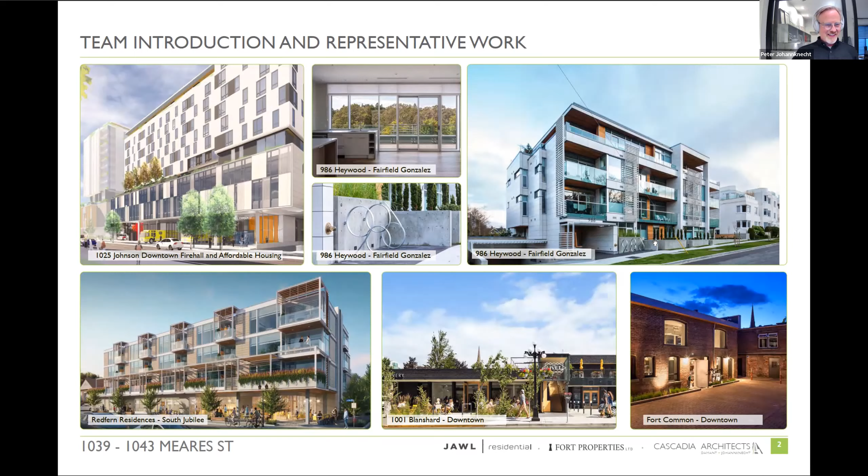It is two vacant lots currently used as a surface parking lot on Meares Street between Vancouver and Cook Street, and it's obviously very close to the downtown core with all its beauty and amenities.

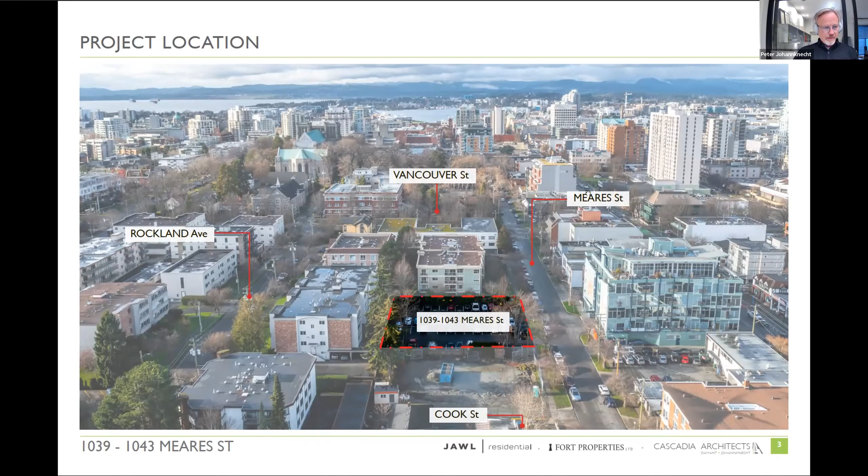The neighborhood context is really informing where we are planning to go with the design and what we think is appropriate on this property. The area is surrounded by predominantly multi-residential uses, with some commercial uses along Meares and Cook Street. Across from our site is the iconic Mosaic building, designed by John Di Castri in 1963 for the Royal Trust Company, later converted to condos with some commercial uses along the ground floor.

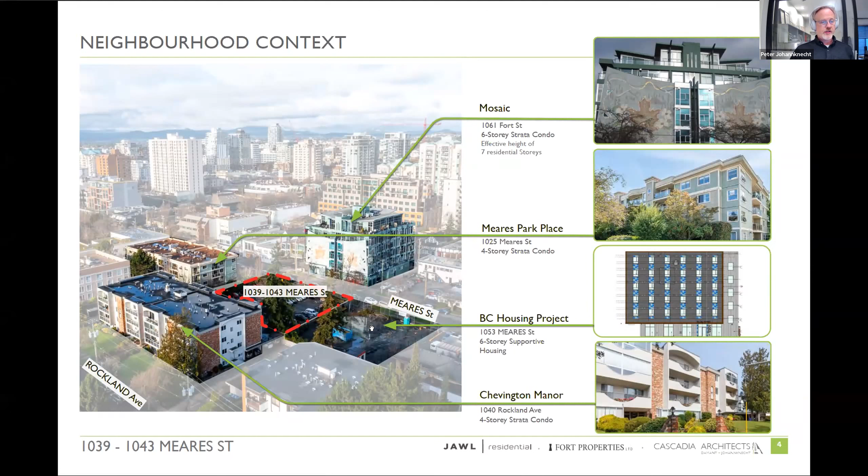There are two 4-story apartment buildings flanking the west and south of the site, and also the new BC Housing project, which is now under construction and will be a 6-story supportive housing project.

The current existing zone is R3-1, shown right here in the center, which allows up to 6 stories and an FSR of 1.6 to 1.

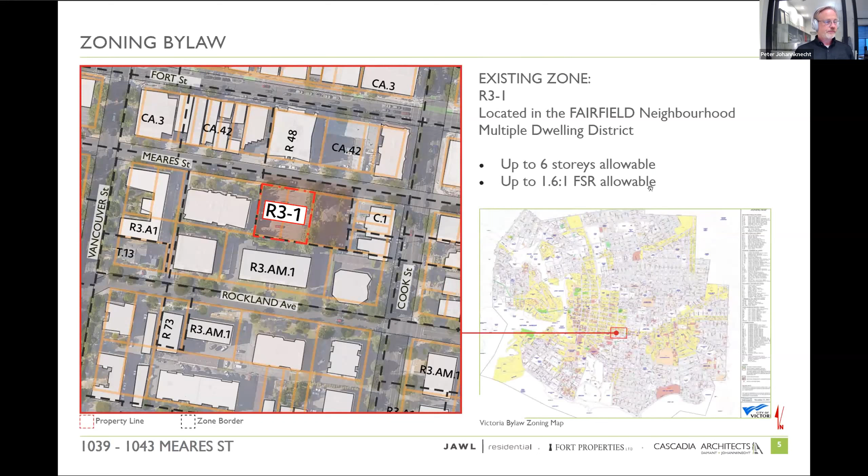When we take a look at the official community plan and its framework, it also envisions for this area up to 6 stories, a higher density of up to 3 to 1, and a height up to 20 meters. It is right along the boundary of the downtown core, the Harris Green District, and the Fairfield neighborhood.

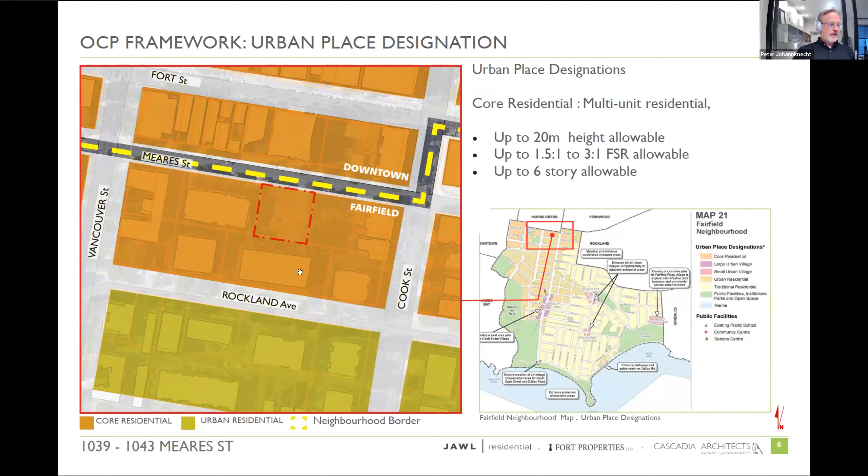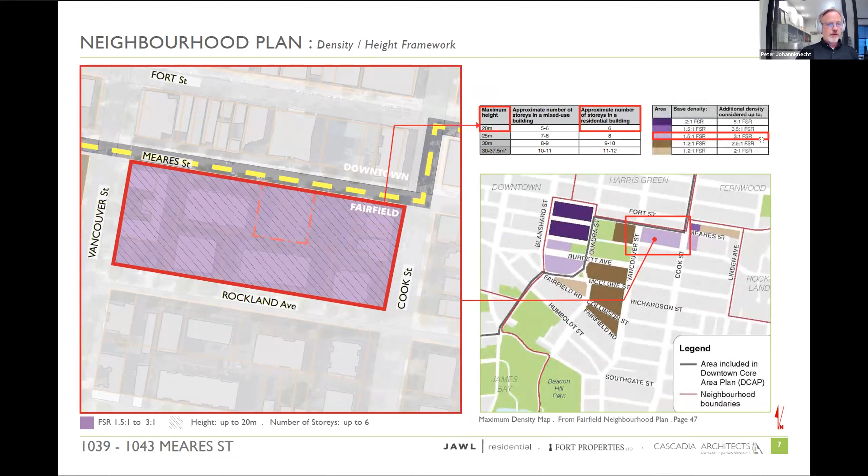As shown here in the color, taken right off Map 21 from the neighborhood plan, it is destined to be core residential. When we look at the very recent neighborhood plan from late 2019, it confirms what the OCP is envisioning: a maximum height of up to 20 meters, which is 6 stories, and a density of 1.5 to 3 to 1 FSR.

All of that is really driven by its close proximity to downtown and all the infrastructure and amenities around the neighborhood, and also the transportation network that has evolved over the years. You can see all the various roads, with Cook Street and Fort Street being quite rapid and frequent transit corridors, and a much better bike network than ever before.

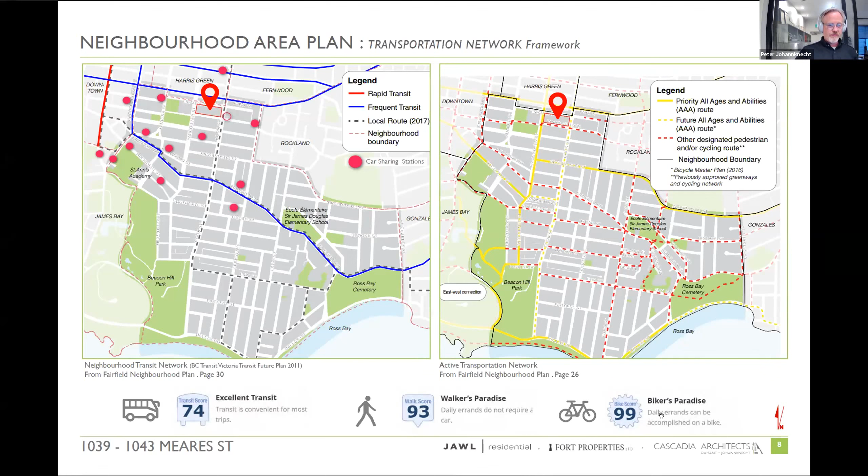These red dots show where car sharing stations are located, with a new one coming very close to the site on Meares and Cook Street. All that results in a very high transit score, a Walker's Paradise score of 93, and an almost perfect score of 99 for the bike community.

So when we take a look at the actual site and what this means in order to place density, we took an area of what a 6-story building with an FSR of 3 to 1 would actually look like. If we place this in the center of the site, we also look at the adjacencies around.

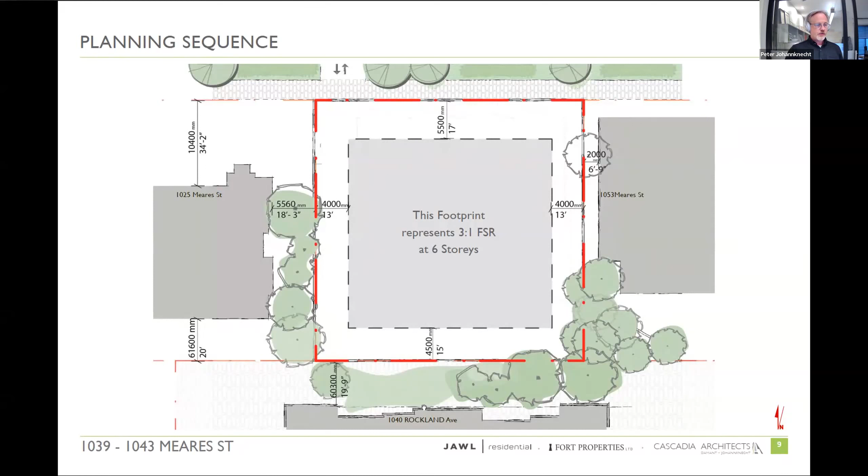We have the BC Housing project right here to the east, the Mosaic right across Meares, and green space to the south with 4-story apartment buildings along the south and west.

We think because of the adjacencies, a future building should be placed closer to Meares Street. Because of the building shape and height of the BC Housing project, this is the elevation right here, it's actually the exit stair fairly close to the shared property line. We feel it's also appropriate to place the building closer to the east property line.

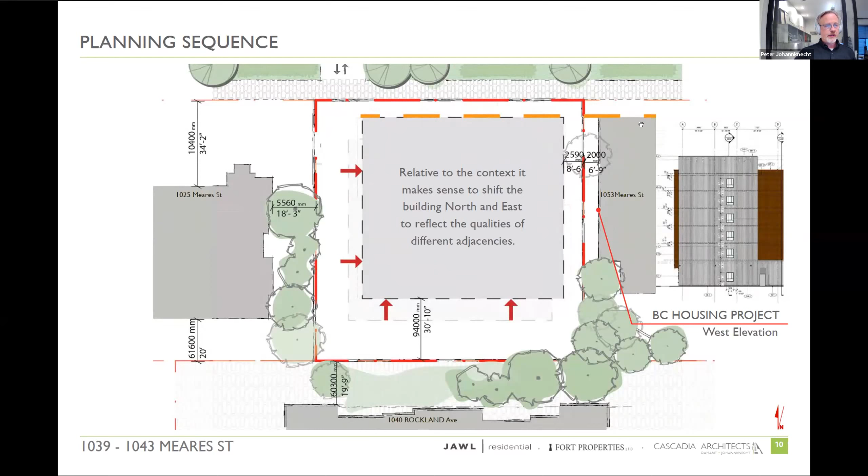Lining it up with the new neighbor to the east allows more space to the residences to the south and the west, and also really values the existing greenscape along those boundaries, working with the sun, where we've visited the site a number of times. Our first office was actually right across from the site in the Mosaic building.

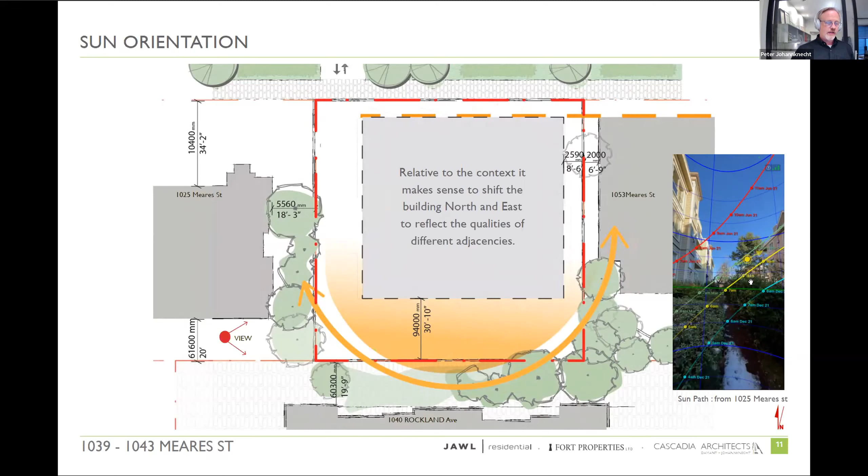So we know this area and site very well. You can see in this red dot here, a view towards the east, which is this diagram, informing us where the sun path is in the summer, winter, fall and spring.

So with that in mind, we continued with the idea of placing a building that actually has no underground parking, where the ground floor is half parking behind, with access off Meares Street. The driveway would be along the west, and the black dashed line above shows the other floors above.

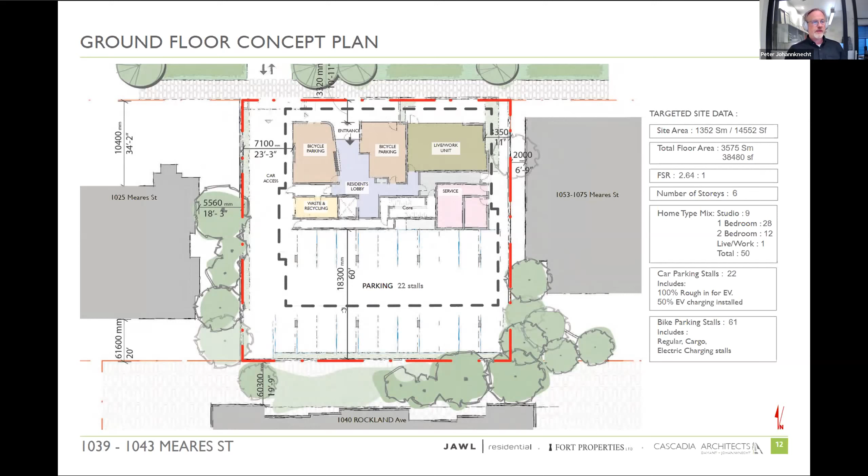So large bike rooms, a live-work unit on the ground floor, and then a mix of studios, 1 bedroom and 2 bedroom units on levels 2 to 6, with a total of approximately 50 units and an FSR much below the OCP's and community plan's target, which is around 2.64 to 1.

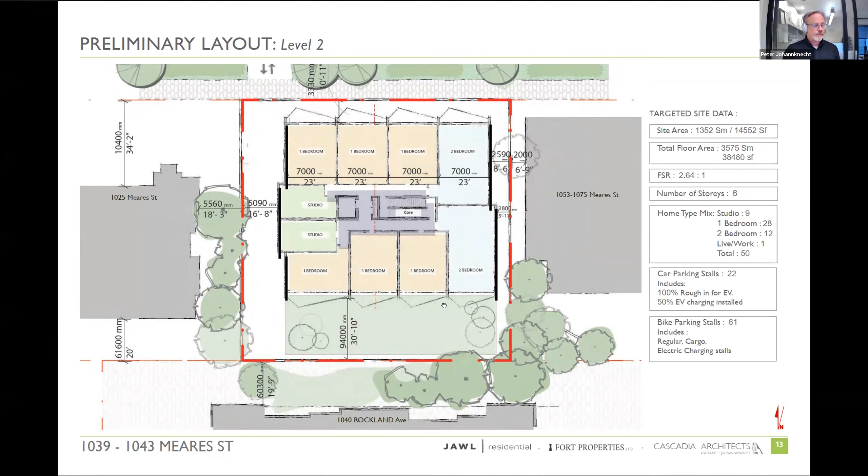The street section we wanted to share just to give you a relationship to the Mosaic building, which is right across Meares, but also really honing in on the idea of putting parking at grade behind the ground floor, which would then be covered by the floor above, putting all the residential uses on levels 2 to 6.

And service spaces and bike storage on the ground floor. The biggest advantage of not having an underground parkade is actually having very little impact on the existing boundary trees along the property lines, knowing these will be valued as a buffer between a new building and the existing buildings, neighbors, views, privacy, and the value of greenscape.

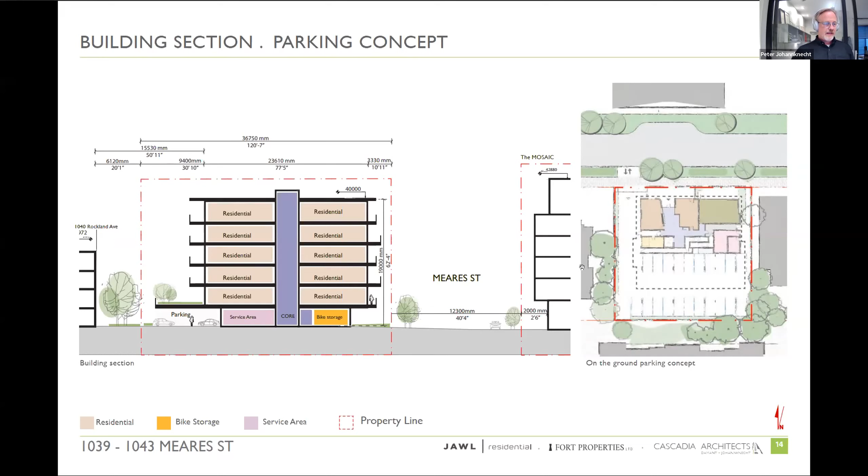There will probably be new trees along Meares Street, and the whole frontage has to be designed together with the city and the community, but that's generally the idea of a current massing concept where we think it's responding to the policies of the city and what we've heard so far from the community, residents and neighbors.

And here also responding to the taller BC Housing project to the east. Across the street, the Mosaic effectively being a 7-story massing - it is a 6-story building, but it was actually designed as an office building back in the day with higher floor-to-floor levels, so it is taller than a 6-story residential building.

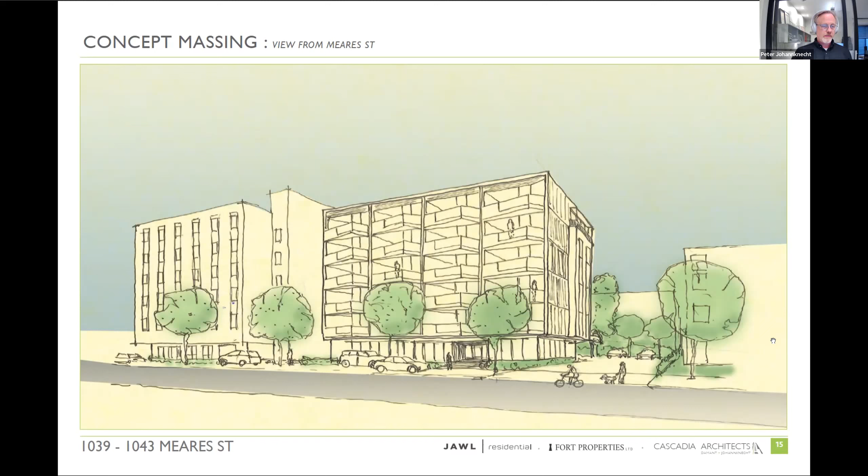And then here having that gap to the neighbor on the east. With that, it's the beginning of our consultation - it's the end of the slides we have.

It's just the start of the journey, and we're here to listen and to provide answers as far as we can. We're really looking forward to developing a design and concept together with you and the community. So with that, I'd like to hand over back to Liz.

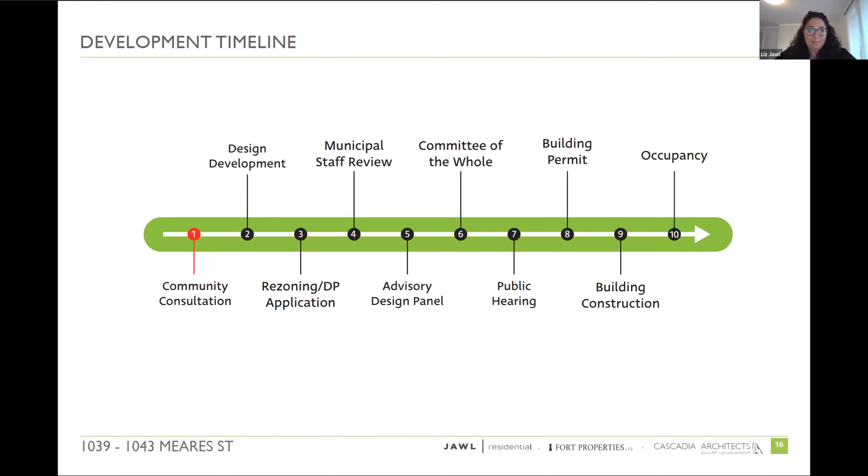Yeah, I echo what Peter has said, and we're really excited to move this development concept forward. We're excited to hear your feedback and answer any questions you might have.

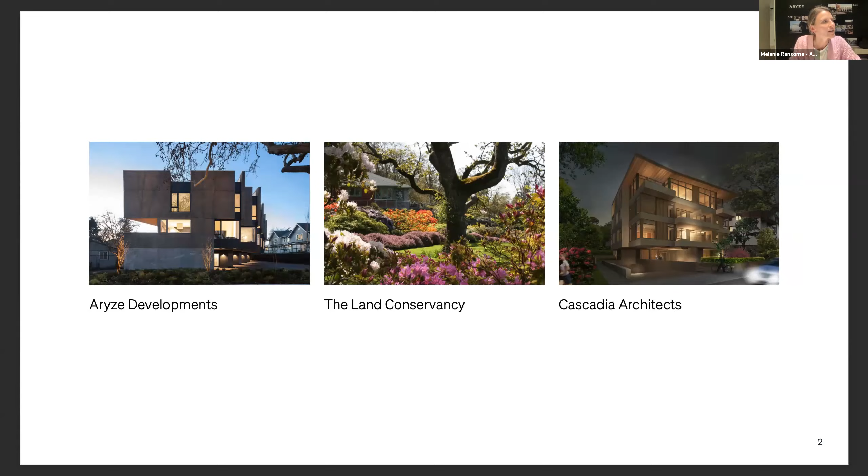From a transportation standpoint, the area is also very well serviced. Fairfield Road really is a spine running through this part of the city, connecting lots of destinations from Oak Bay and direct routes into downtown. I'll pass it off to Chris now, who will share a bit more about the context and the importance of embracing areas like these that are really great candidates for added density.

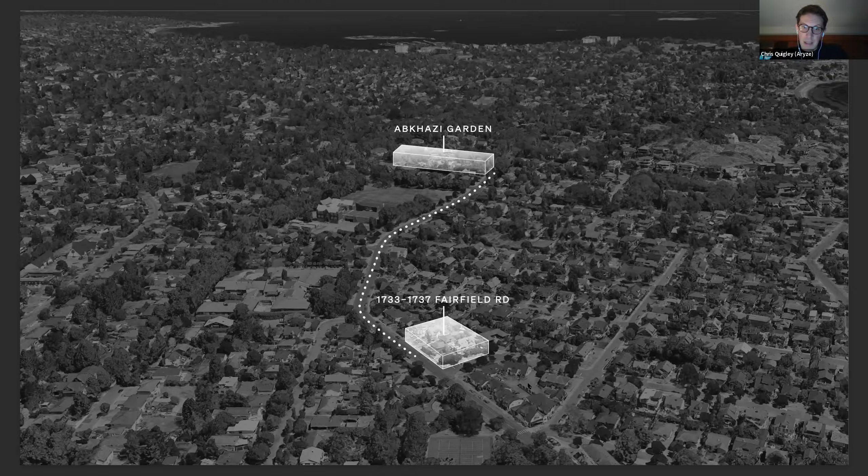So Kathy from the TLC is here tonight, so I'm just going to pass over to Kathy to tell you a bit more about the TLC and Abkhazi Garden. Thanks very much, and welcome.

Thank you for joining this meeting, everybody, nice to see you virtually. The Land Conservancy acquired Abkhazi Garden in the year 2000, and we actually explored the idea of removing the density at that time. So this is not a new concept for us—we've touched and circled back onto it several times over the years.

The property is currently zoned multifamily, as you heard, and that's not consistent with the current use of the property and the activities taking place there. So downzoning would bring the property into compliance, while at the same time lowering its market value.

It was mentioned that other cities do density transfers. This is kind of a new concept for Victoria, but in Vancouver, for example, a church trying to save its site sold its density to the city, and in Vancouver they buy the density and hold it, and then a future development can purchase that density from the city. We don't have that kind of mechanism here, but Victoria did work with us, and we developed an agreement with them back in 2014 that outlined what the process would look like.

So the process is that TLC would seek a developer, would seek a development project, and would bring a joint rezoning application—so the two things are working at the same time. This will be us releasing our density, removing it from Abkhazi Garden, and the other project adding some of that density into their site.

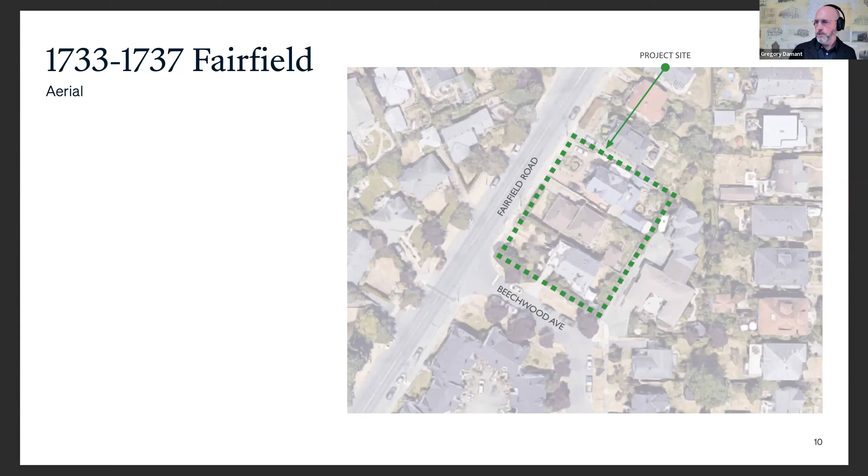So just to reorient you back to the site, we're looking at the corner of Beechwood and Fairfield, the three lots there to the northeast of Beechwood, starting at the corner. And Melanie, could you advance the slide?

So as was just explained, with the density transfer that's envisioned, Aryze was looking for a building in the neighborhood of about 20 units on the site. That would typically mean a standard condominium floor plate of front and back oriented units, about 22 meters wide. If you just place that on the site, it would sit in a location like this and occupy about that proportion of the site.

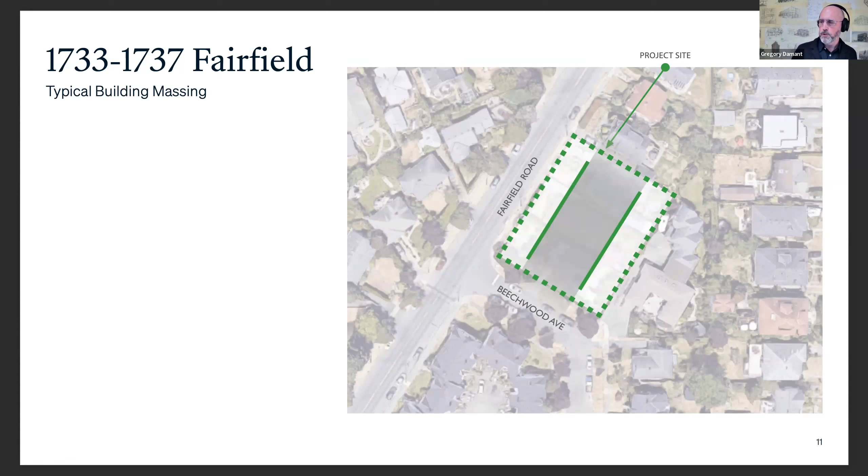So the first move we've done is to push the proposed building site closer to Fairfield, similar to what you see with Aurora Manor, the 3.5-story building across from Hollywood Park. As well, the Montague Court immediately beside us across Beechwood all have a slightly closer frontage to the street. Fairfield's a wide enough road that it can accommodate that kind of proximity.

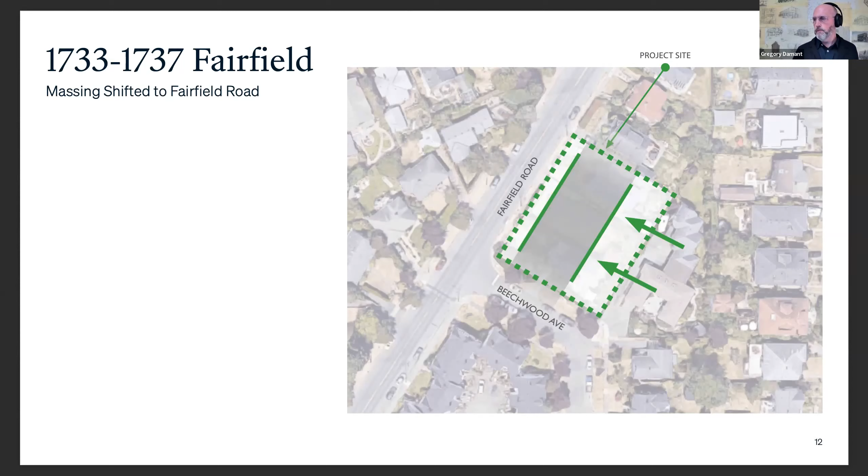It actually feels quite comfortable. What that does for us is it opens up the backyard of the site, keeps our building form in line with the houses fronting onto Fairfield Road, and helps maintain that kind of spacing of built form that exists currently amongst the single family homes in that neighborhood.

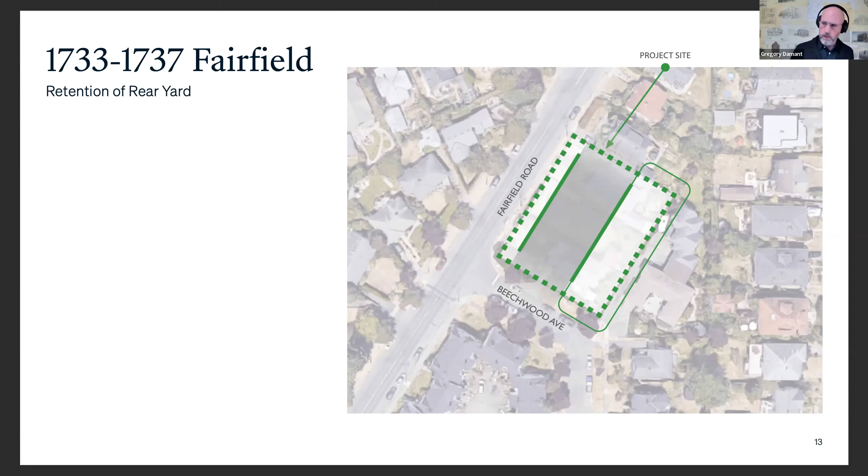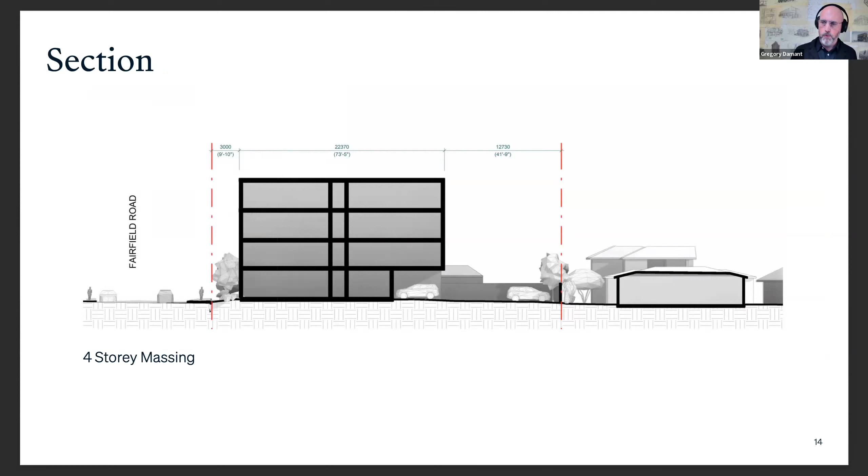The first thing we did was look at the ground floor on Fairfield, where it's a fairly busy street, and converted those lower 2 floors facing Fairfield to townhouse style units. So we have 6 townhouse style units along Fairfield. What that does is lift the living area to the 2nd floor and give a bit of separation and privacy from the street.

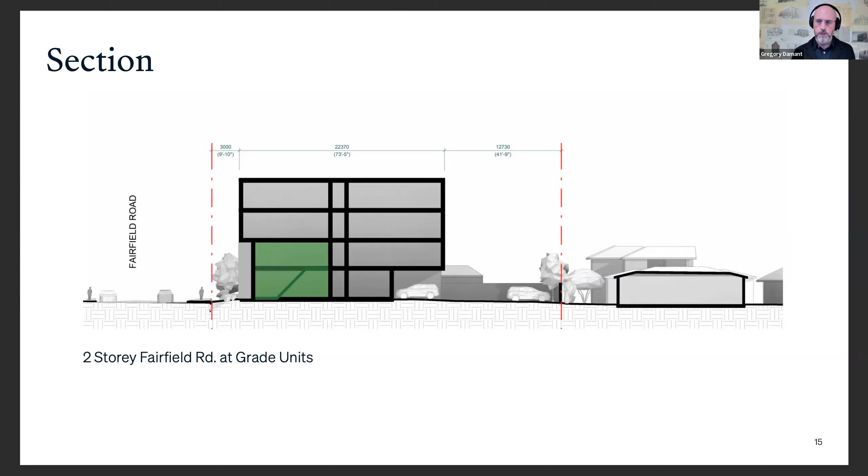That leaves the remainder of the upper floors for that target demographic that Arise has mentioned, people looking to downsize and right-size in the neighborhood but who want single level living. So we have the 3rd and 4th floors, and part of the 2nd floor, available as single level living units.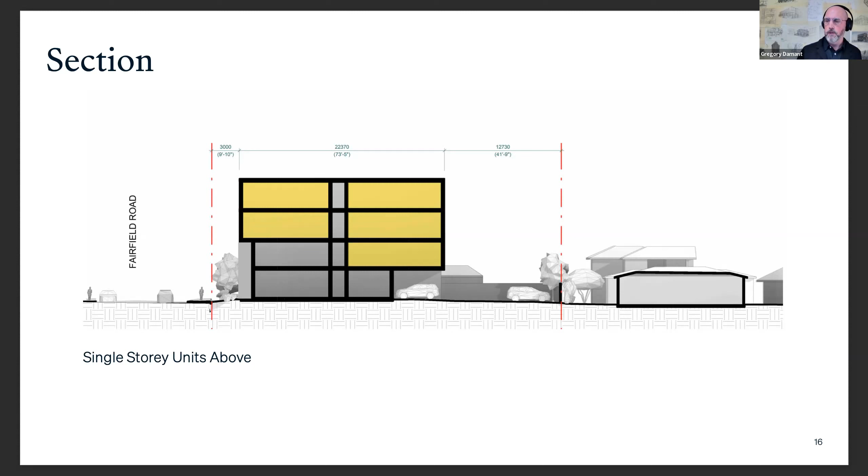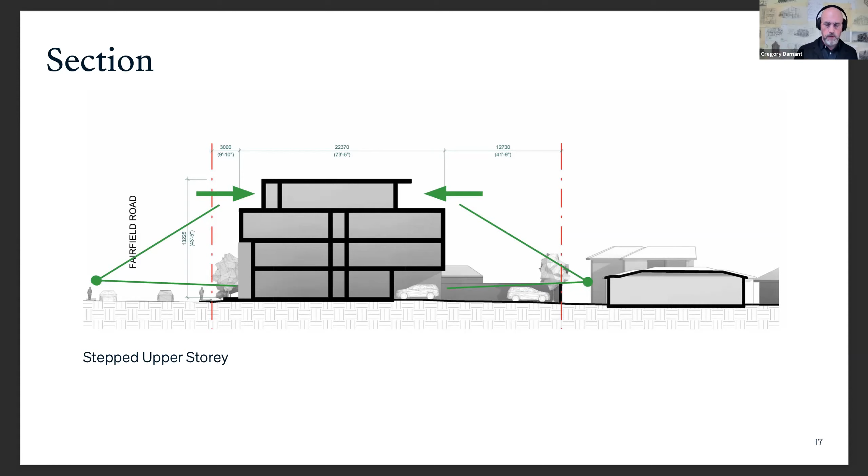But it's our feeling as architects that within this context, something less than 4 stories is more visually appropriate in terms of fitting in with the neighborhood. So the next move is to tuck in that 4th floor, creating more of a penthouse level as opposed to a full building floor. What that does, from grade, from the pedestrian realm, is start to obscure the vision of that 4th floor and give the appearance of a 3-story building.

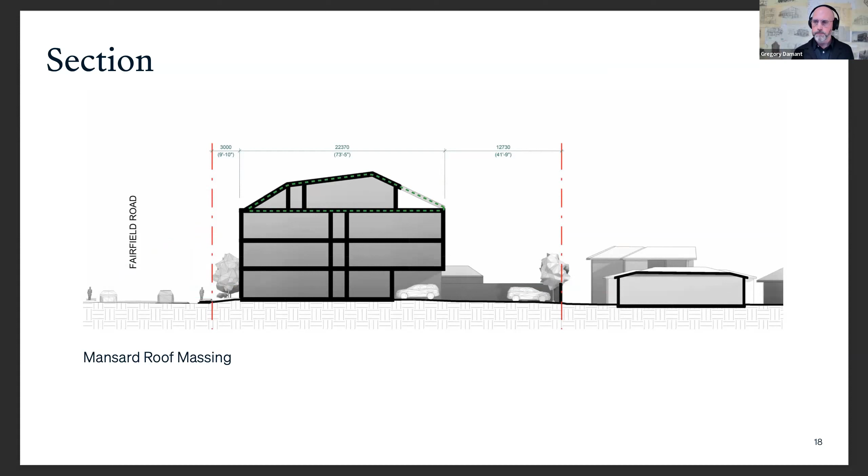Using our 3D modeling software and views from around the area, looking from Beechwood and along Fairfield from both directions, we've shaped a mansard style roof that effectively conceals from most viewpoints the presence of that reduced 4th floor. That was the first key move, shaping the roof line of the building to give it that 3.5-story feel, as Chris was mentioning.

The second key move is that we've decided to avoid underground parking on the site. Due to the size and proportions of the site, any kind of underground parking here would really be property line to property line. That's always disruptive to neighbors, it extends construction periods, and it removes the natural ecology and hydrology of the site by basically putting a big concrete box underneath the entire site.

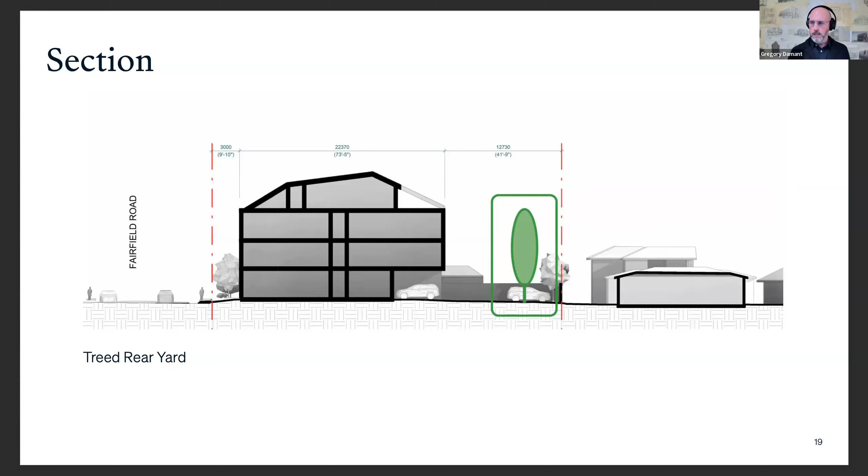So here we've opted to park at grade. This allows us to use stormwater infiltration, maintain the natural hydrological patterns on the site, and gives us the opportunity to plant trees that will grow to full size in the native earth. This is important because it creates a screen between the single family homes to the east and north of the property and the building here, further mitigating the transition between this multi-level building and the surrounding single family homes.

We can go to the next slide. So this is the result architecturally.

The bottom 2 floors on Fairfield are 2-story townhouses, and they present as townhouse units to the street. Bianca has organized a series of smaller scale maple and snowbell trees at each entrance to the townhouses, giving those individual entries a residential character and flavor, like you see with Montague Court across the street. Those 2 ground floor levels are clad in a pale brick, a high quality material appropriate for the neighborhood and the traditional sense of the site.

The 3rd floor is part of this mansard style roof form, clad in a metal shingle—again durable, high quality material—with dormer window forms that echo a traditional building style, presenting to Fairfield Road.

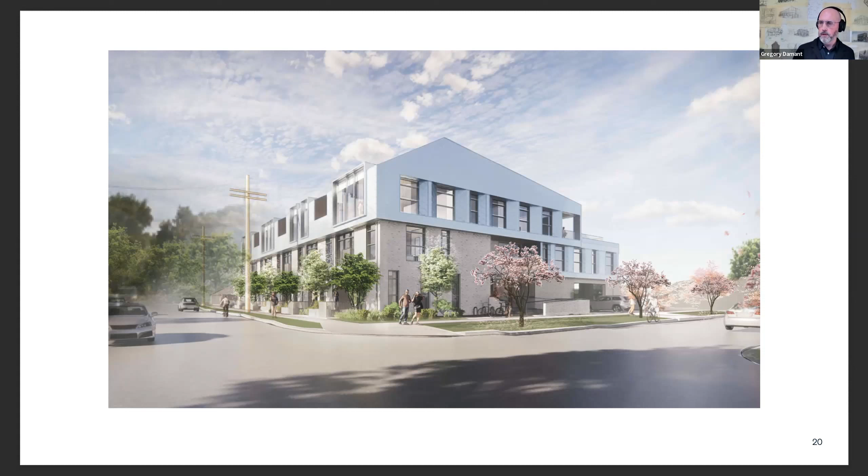You can see the building stepping down towards the rear along Beechwood, and we've got another view of that coming up.

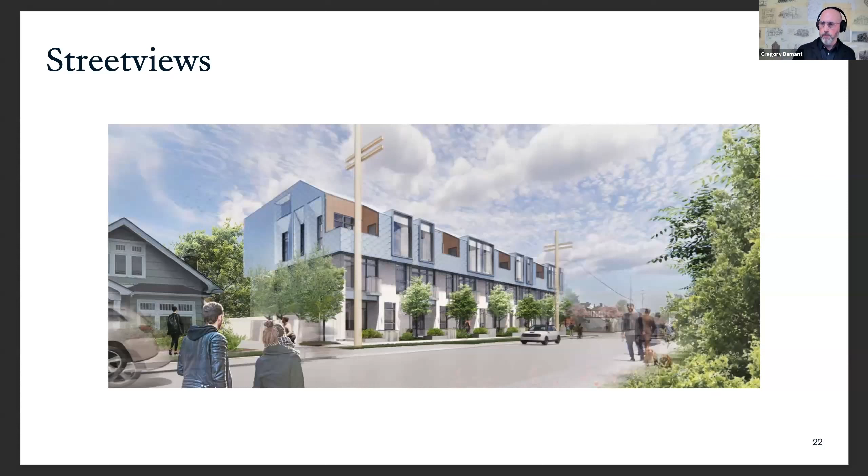The next slide is at Beechwood Avenue view, with main building entries from Beechwood, and the vehicle entrance is also off of Beechwood. You can see the building stepping down from 3 to 2 to 1 level as it transitions to the single family homes beside.

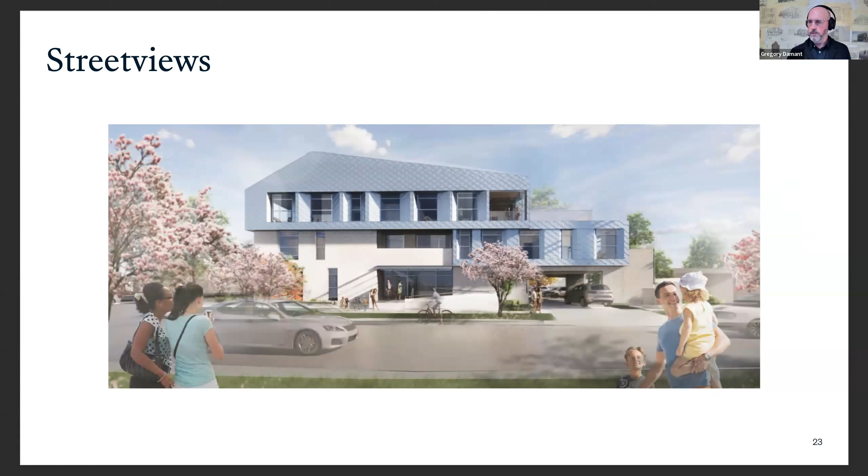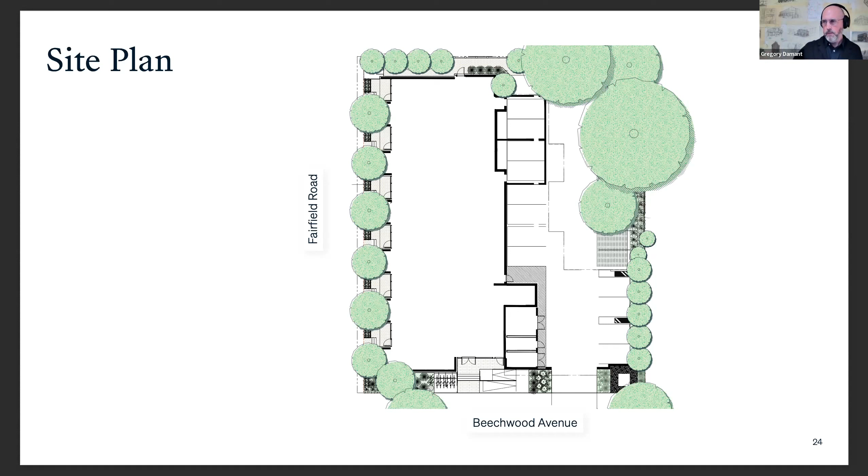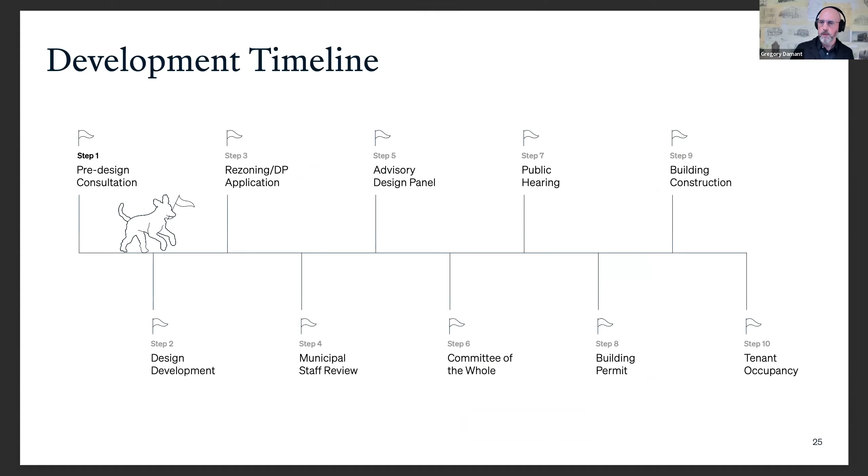We are here at step 1 in the design and development timeline. So from this meeting, we'll be making the formal rezoning application. And that's it, thank you.